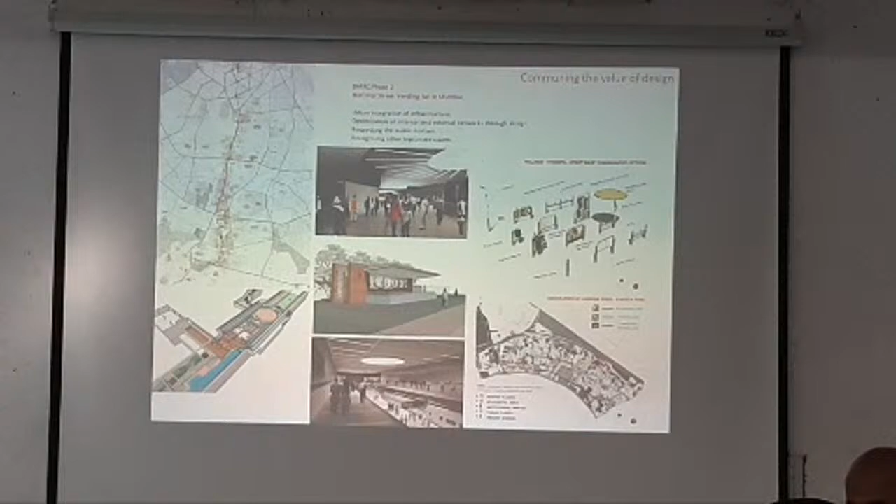That is one of the things I think when you do public work: you have to accept that nobody is going to accept everything you propose. There is a lot of friction, a lot of opposing views. Some of the stuff you propose does go through and a lot of it does not. But that's not necessarily a bad thing - other people have other views and those also get counted.

One of the biggest things we were able to do in Delhi were two contributions. One was, it was the second phase, so there was already a series of stations built, and one of our suggestions was to create a double height volume, which was a big deviation from the first phase projects. Though a lot of our smaller design solutions were not accepted, this was, and I think it makes a big difference to the 7, 8 stations where it was implemented. So that is a kind of achievement.

The other thing we managed to do, that's the little image you see here, is that we got everybody on board with all the services designs to make sure we didn't have what we'd noticed had gone wrong in the first phase - lots of services very badly integrated in the project. Given the importance of services in a project like that, that was one of the things we used to try and give some orderly design.

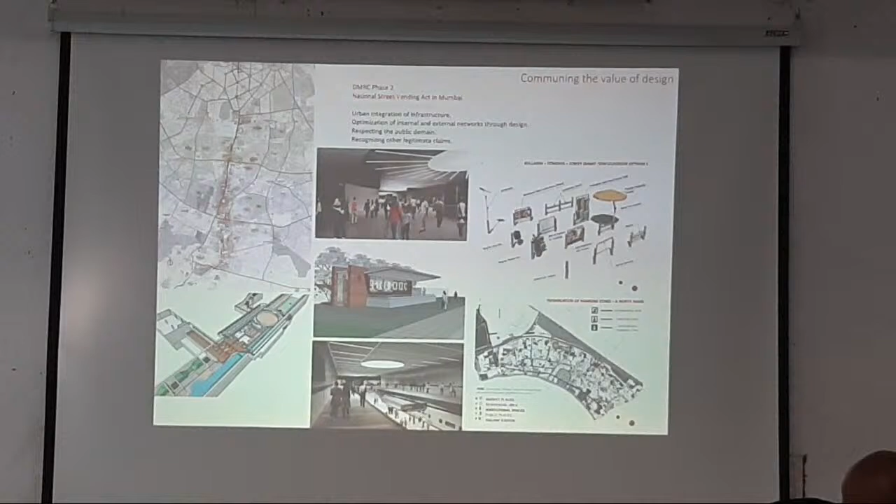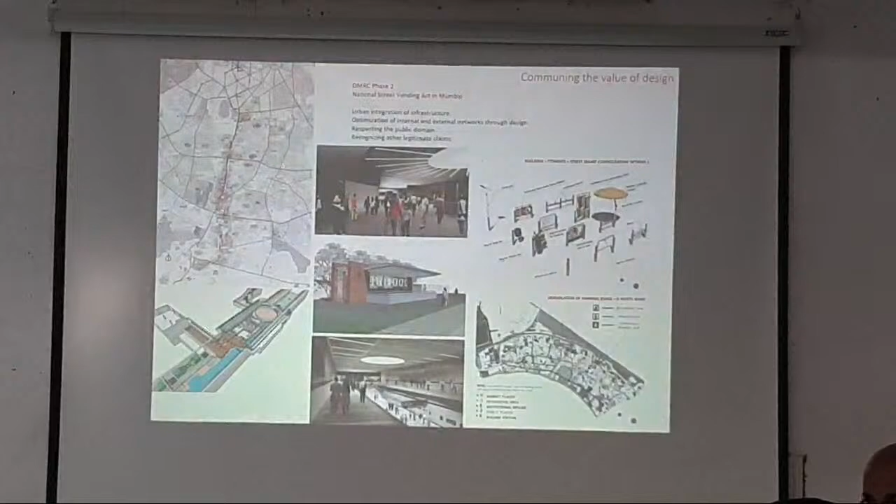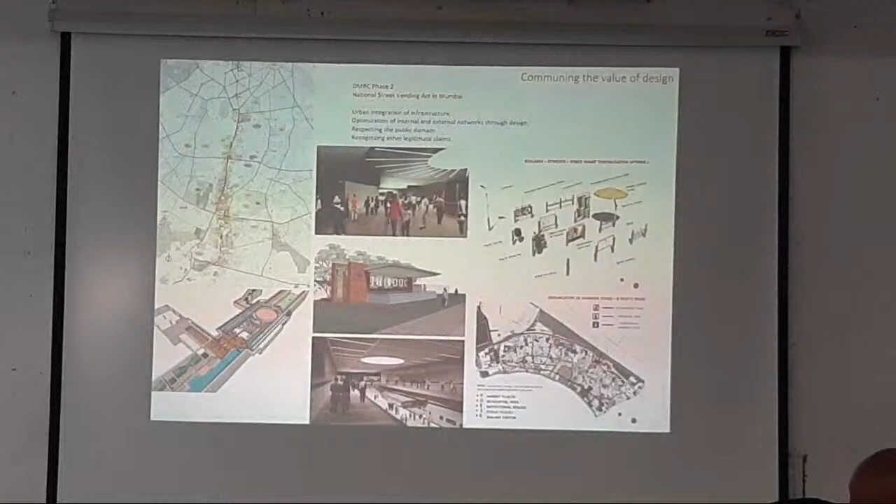The other major submission we worked on was in 2013, where there was this new National Street Vending Act, and I was advising the Mumbai Municipal Corporation on how it could be implemented. The act was very detailed, but the spatial aspects were quite random - they'd just randomly decided a 1 meter by 1 meter space would be given, and on what basis was not very clear. It also said the municipal corporation had to appoint town vending committees to decide, but how they would decide was again not very clear. So our idea was to create a kind of common base based on which these vending committees could decide on hawking policies in each part of the city.

Then there are some public projects, landscape projects, architectural projects. One is the extension of the botanical gardens at the Byculla Zoo.

This is done, finished just after the pandemic. This was a project which we did through the college, through the Rachna Sansad design cell, and we did it entirely through the standard municipal tenders and all that.

So a lot of learning, but at the same time we managed. I think that's one of the things - there are very rigid processes, but if there are things that you think are important, there is a way to work through them. It is still possible, it is tedious. Pranav will also know, Samir will also know, but it is still possible to try and get things done, as long as you have some open-minded officers in front of you and you can do things.

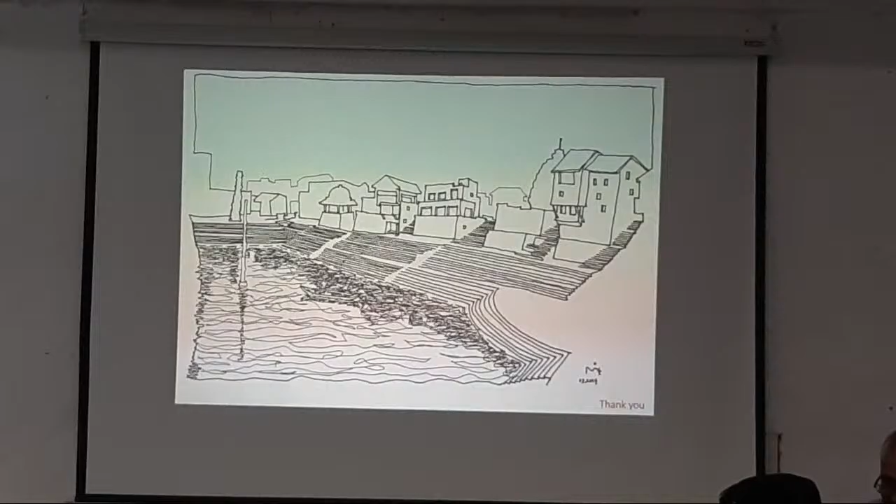Thanks, Rohit, that was great. I really like seeing a project where there's nothing visual about it, because as architects we really have to resist the temptation to be these fantastic guys who parachute in and do something, like a design hero role. It's very tempting to play that role, but I think what he did was perfect. He saw something that was really required there and focused on that. So it's a great pointer to take from that.

I'll be quick because I think there's a lot of us to get through, so I'll tell you a bit about my route. I took a slightly different route to a typical architect. When I graduated, I went and worked in a structural engineer's office. I actually worked for Shirish Patel. Jasmine knows him well. I'm still not sure exactly why I did it.

I think I felt I didn't understand structures properly, and that I needed to in order to become a good architect. So I went there, and luckily he's one of the most brilliant engineers to exist in the world. He can solve any problem in structures to an approximation in, I would say, 30 seconds. So it was great for me to actually learn that.

Then I set up his architectural department, and we did lots of interesting projects. I did aircraft hangars, and we did factories for BMW and Skoda and lots of other interesting things, and earthquake resistant housing, stuff like that. Then at some point I quit and set up my own practice.

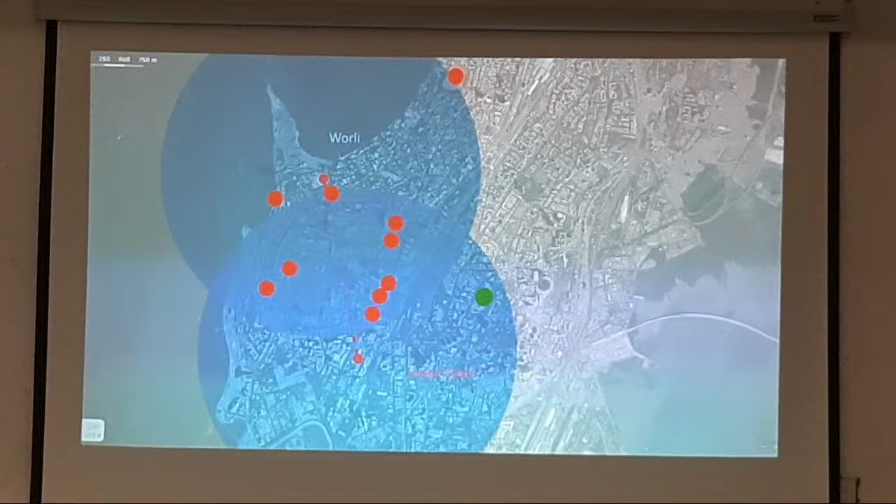Like Samir said, I'm walking and I'm observing things and I'm saying, hey, what's wrong with you, why are you doing this? So let's fix it, let's fix it, every time. The way I see it, it's actually a selfish pursuit. I see myself as a pretty selfish person, that I want the road I'm walking on to be nice, but I also want it to be nice for everybody else. So it's the selfish pursuit of a higher quality of life for all. That's the way I see it, and that's how we've been functioning with our public projects.

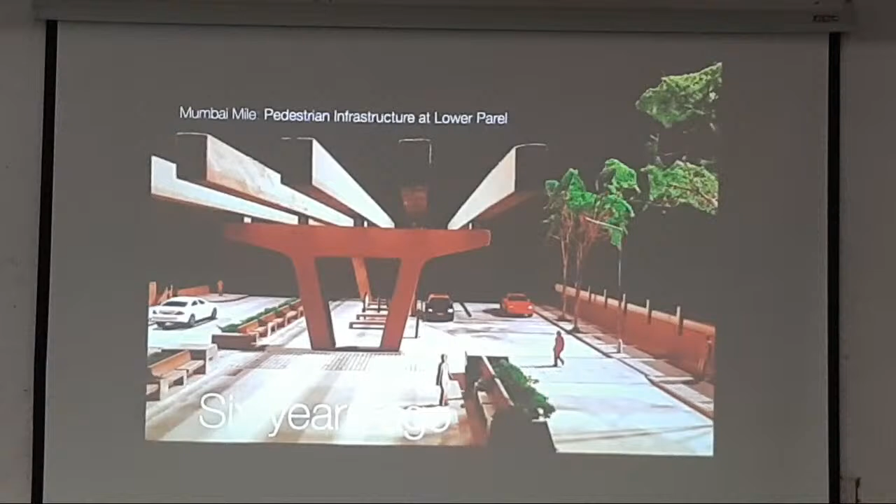So this is the second project I'm going to show you. This is Tulsi Pipe Road, and this was 6 years ago. This is spaces under the bridge at Lower Parel. A small diagram of what it looked like: office buildings everywhere, and illegal parking with one U-turn in the middle over there. A lot of cars just sitting there, and spaces under the bridge being used as a toilet, and really tight spaces over there where the two arrows are, because the U-turns were really tight.

And it was actually common sense that you don't have this sort of U-turn over there. These two green arrows are the only places where you could cross the road. So this was a whole big mess, this junction at the end of it. So he said, hey, move that U-turn so you have some more space for the signal ahead, and add some more crossings. Why only those two crossings on one side?

So they agreed, and we got these two crossings here. We reduced that size in the front so that you can have more cars waiting at the signal, and then we tapered that off. We made a turn over there. And in the purple, we created a public toilet, so that people don't have to use the columns of the bridge to piss on.

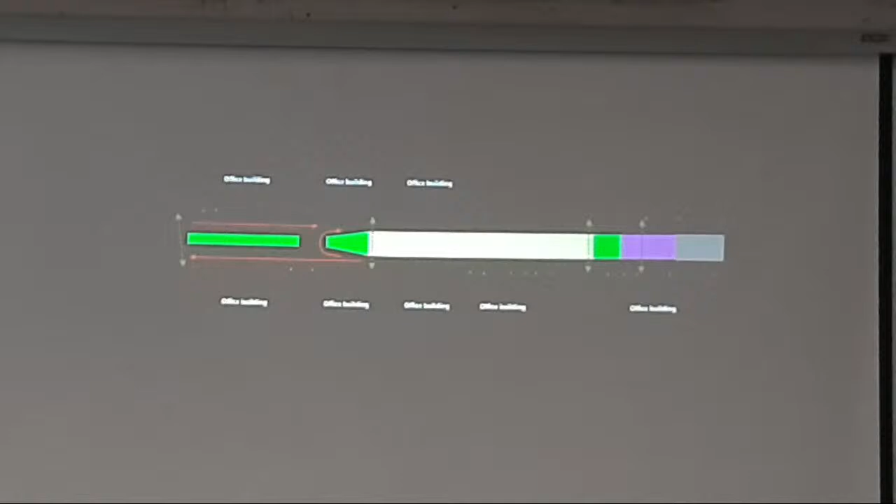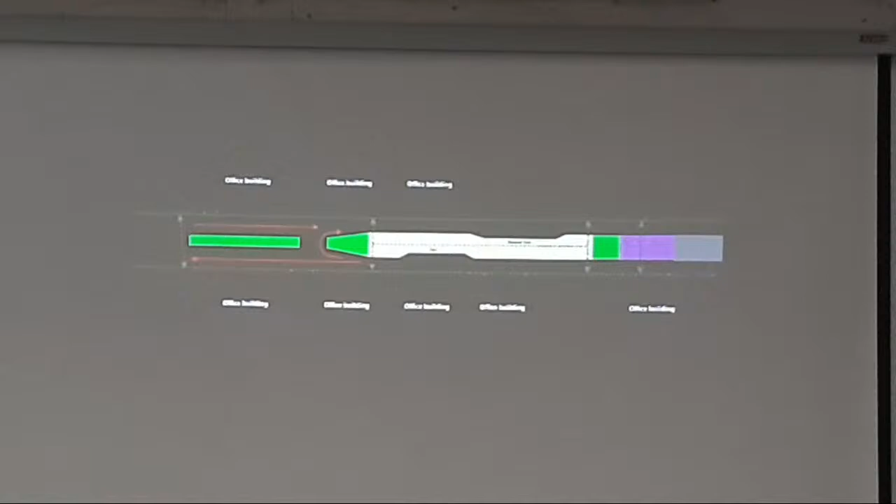After that, ahead there was a shared taxi stand near Kamla Mills, so we brought that in here and made taxi bays for them. Overall, we added a lot of footpath space, because you can now cross over at any place and walk across this, or sit inside that and come.

No one comes to you and says, okay, there's a public project, do the public project. So what are the kind of processes and methods you follow to begin to intervene? This is a drawing from one of our projects in Hyderabad, showing how the city surrounds the building, and you're interested in how the building can become part of the city, part of the context. So I think we want to talk about the method we followed.

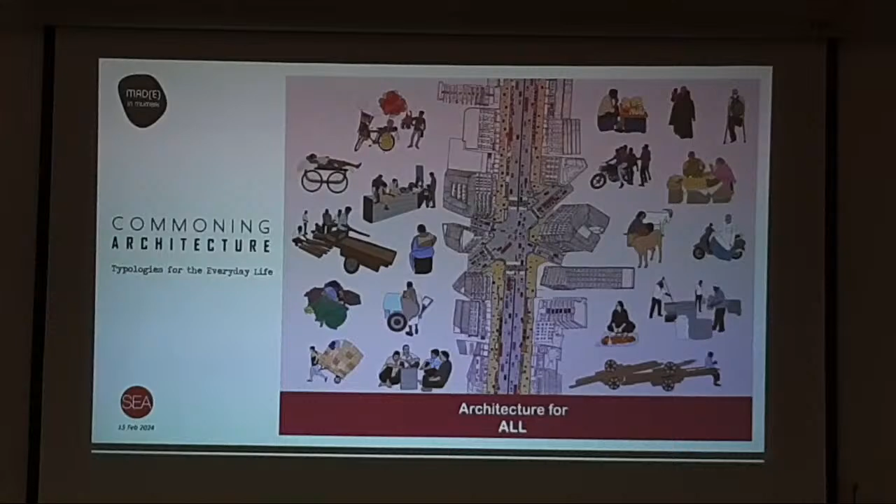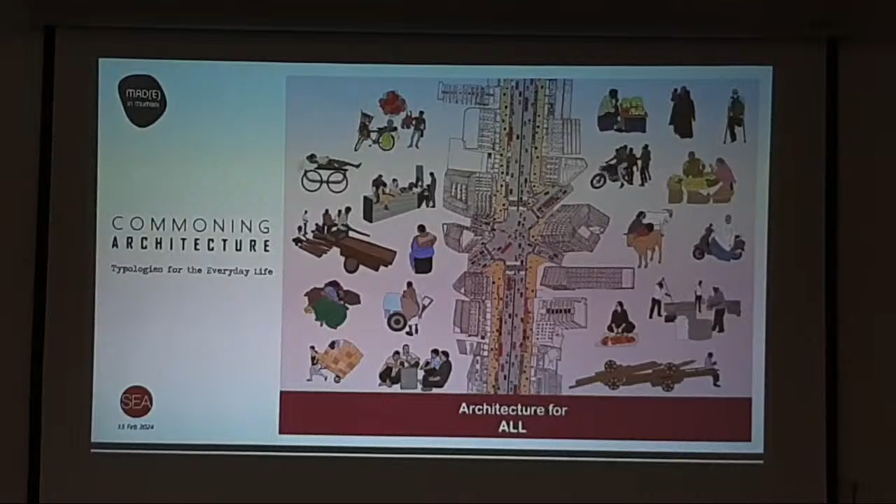This is a drawing from one of the competitions we did on street design, and the context is made up of a variety of people who are staying, working, storing things, and passing by. So the domain is made up of multiple sets of stakeholders who currently occupy it.

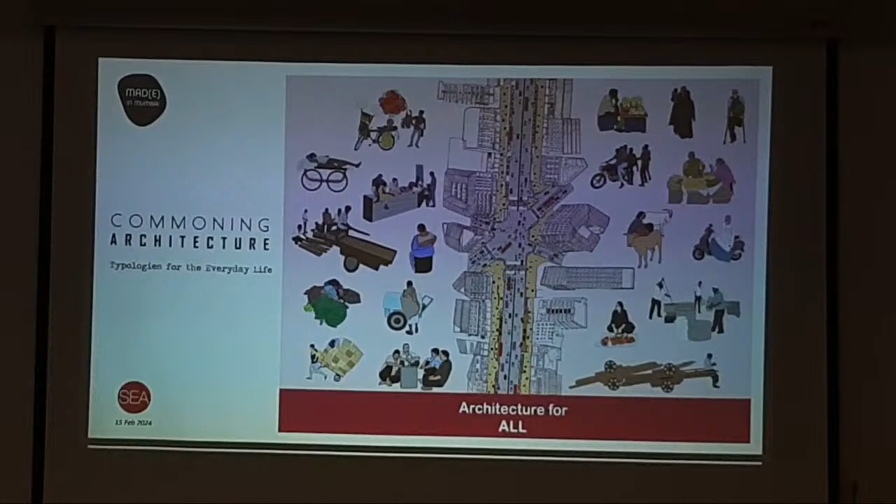Other than the people who live, work, and play, there's also the domain of bureaucracy, which moves around. Even if you're moving a light pole, you go to BEST. If you're looking at a tree, you go to the garden and trees department. There's a traffic department interested in regulating how traffic moves. So there are various stakeholders working alongside, and on the ground there are commuters, hawkers, vendors, and people visiting the market.

There are lots of goats on the street, tied there because they belong to the shop owners and are fed leaves every day. On a Sunday, the entire pavement becomes a bathing ground for all the goats. So there are a lot of multiple stakeholders on the ground.

If you look at this, the in-between city, which we see between the comforts of our homes and large infrastructural projects—this is an in-between, kind of liminal city.

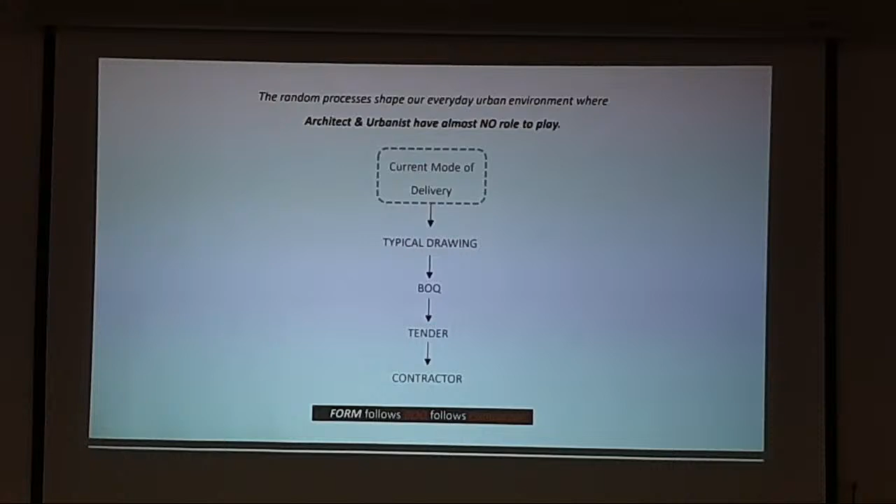If you wonder why it's like this, look at the method through which the city gets made. For any projects—let's say public toilets, or smaller projects in villages, or Anganwadis—the method of making is: first you have a typical drawing, then the BOQ gets made, then the tender is invited, and then it goes to a contractor. The role of an architect, urban designer, or urban planner—there's no role for any of us actually. So how do you make space for us? Generally the form we experience in our everyday city comes out of this process. So the form of the city, in some sense, follows the BOQ and the contractor.

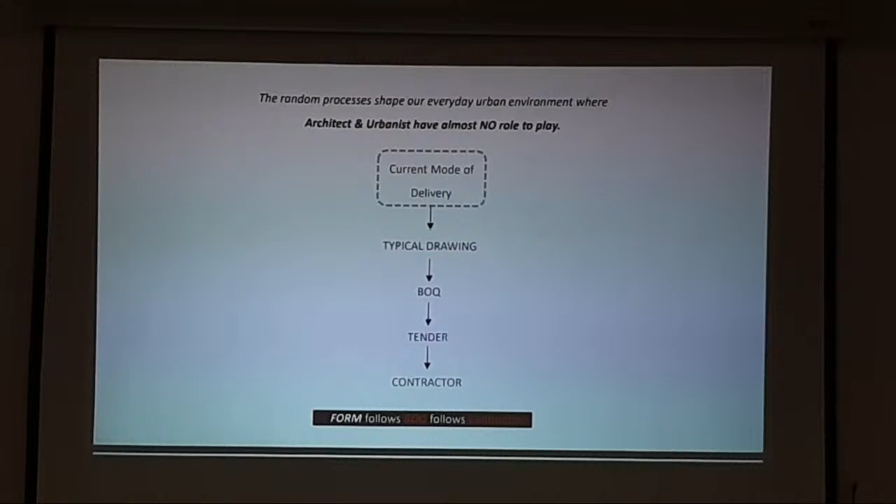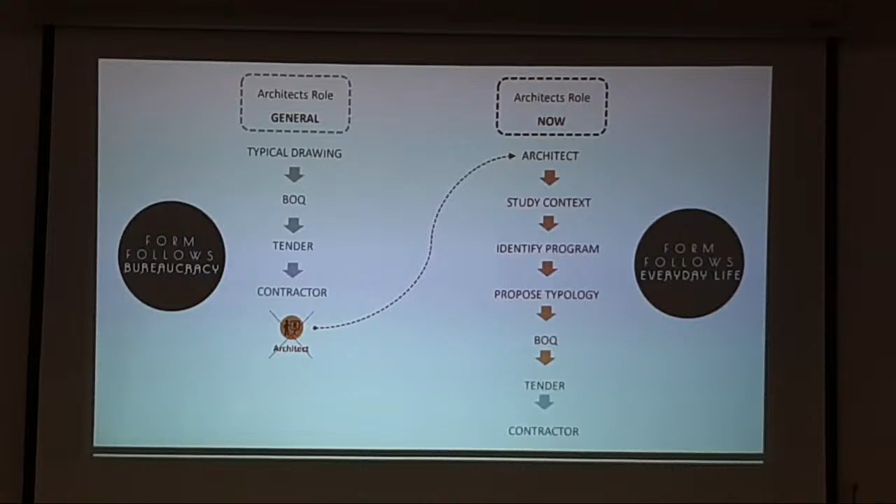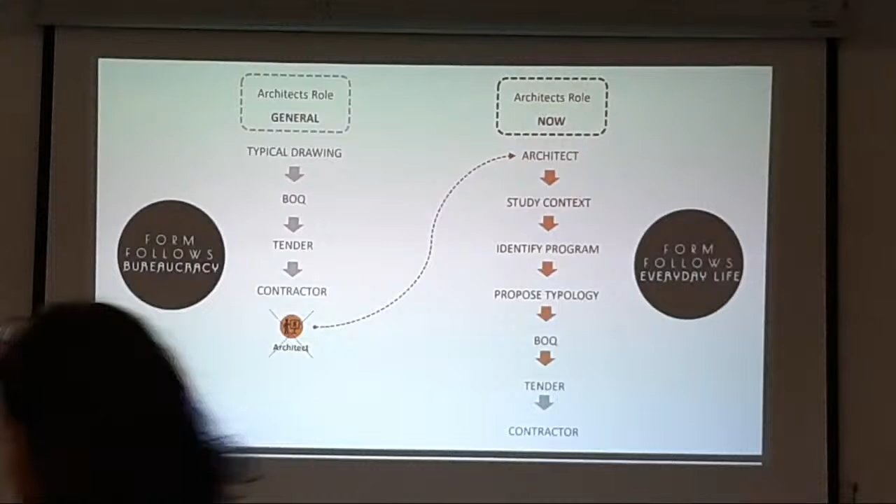The ideal method through which we wanted to intervene is: when there is a project, you bring an architect, urban designer, or urban planner. They study the context, they study the site, they look at the stakeholders who are part of the landscape. They identify things, it's the way we do projects in college—you identify stakeholders, you identify what program can go into there, you figure out an appropriate typology. Then you prepare a BOQ, then goes the tender, and then comes the contractor. That's the method through which we wanted to work.

And then we wanted to work with what role architecture and design can play in shaping this everyday environment.

If you study what the state is currently building, there are multiple chota programs being built where architects and urban designers aren't involved, unlike in larger projects. A chota project is a public toilet, a seating, a bench, or a crossing. That's why, when you're walking, a crossing will hit a pole, or be barricaded, or there'll be a statue there—because no one is actually looking at the ground and saying, okay, there's a crossing here, people need to cross, so there has to be clearing. So you need someone to look at these very chota conditions very carefully.

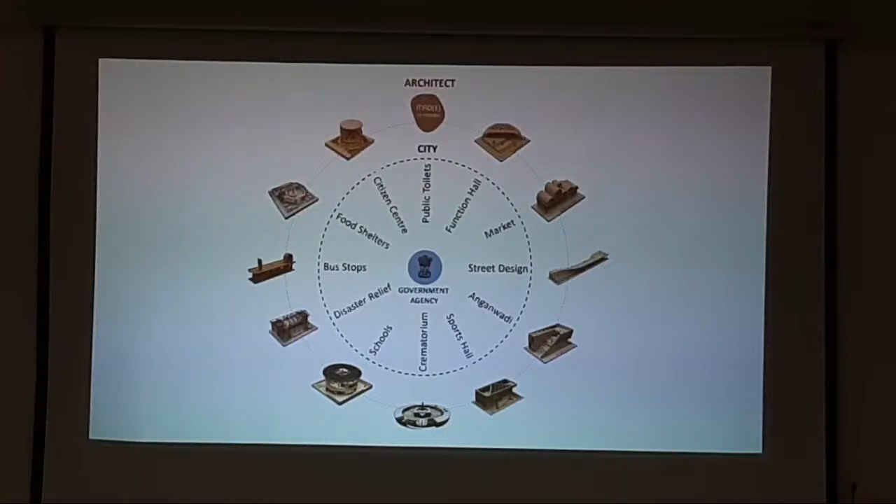So now what shall we do? We want to enter this landscape—what do we do? There are a few methods we followed.

One was the making of books and publications, looking at certain smaller programs of the city and making a manifesto of how you go about designing them. Along with the publication, there was this idea of an exhibition—how do you reach out? Your client is the government, the politician, the bureaucracy, the everyday public. How do you really reach out to them and explain what your role is?

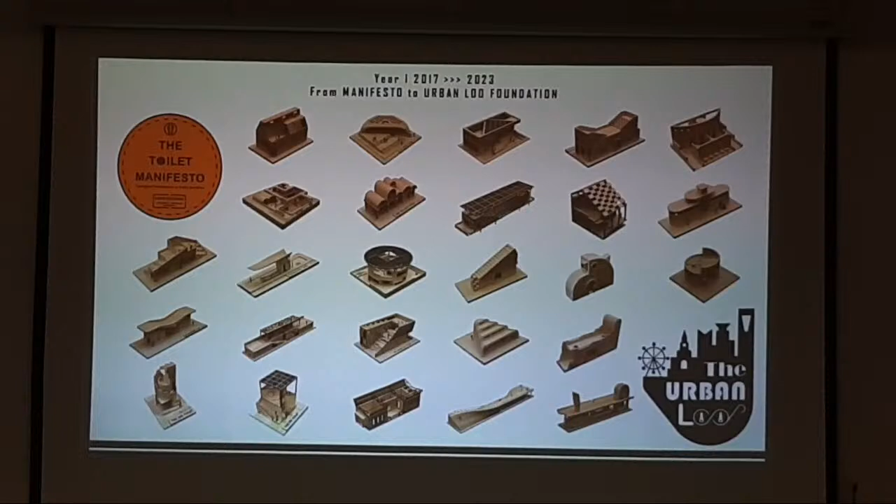So we started with a traveling exhibition—this was in 2017. We designed a manifesto called the Toilet Manifesto. It was funny because toilet was something so small and mundane, a dirty program, and yet there was a large manifesto dedicated to it. It started as 10 typologies for the city, and has grown now to more than 75 typologies.

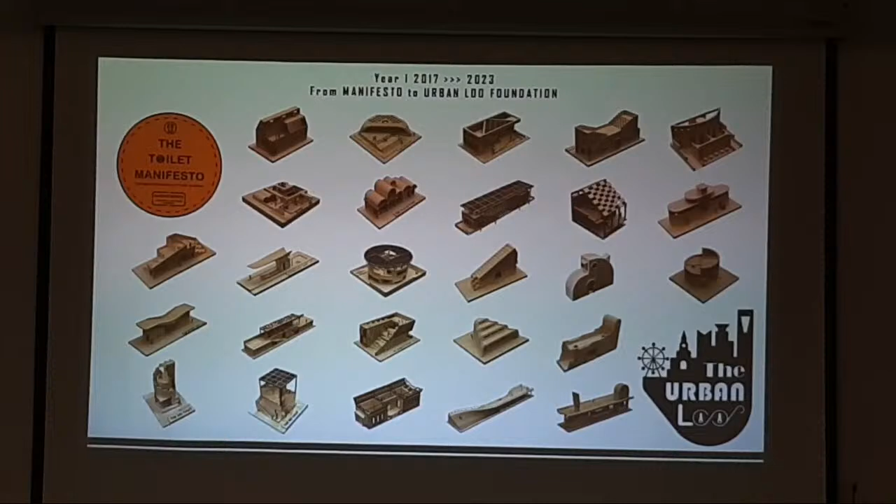We started with the site condition—what if it's a pavement site? What if it's connected to a garden? Or what if it's an island in the city? What if it is located within an informal community? So what should the type be like?

As we traveled to different cities and states, we were commissioned for different sites. From 10 typologies, it grew and kept changing. A different site would bring another typology, and one typology might tweak and become another kind of type in a way.

But over a period of time, we realized that implementation was a major issue, because it will go into a tender process. The tender process may mean you get certain kinds of contractors, because the budget of a toilet project is very low.

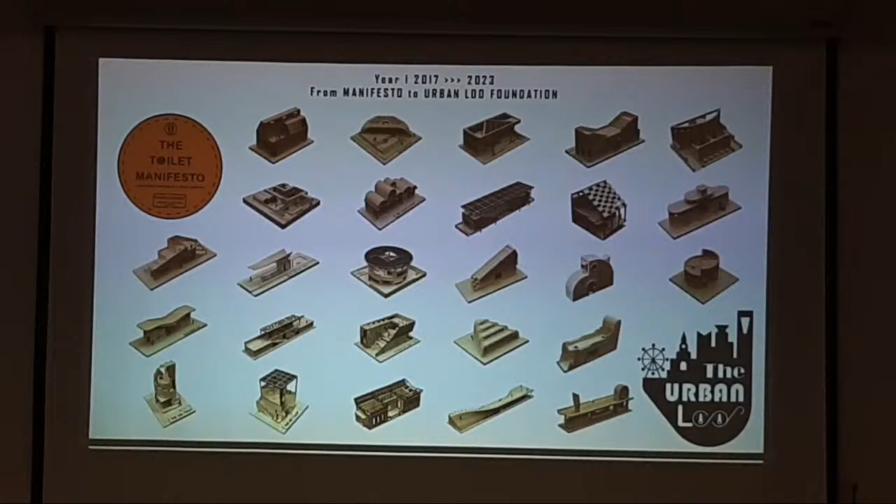So the kind of contractors you get are the last category of contractors. And then you're going to completely compromise on the fundamental - I'm not saying so much on aesthetic, but the fundamental architecture. There's a toilet, so there has to be ventilation and light coming through. But with a contractor who doesn't understand this, it becomes really difficult, because aesthetic is okay.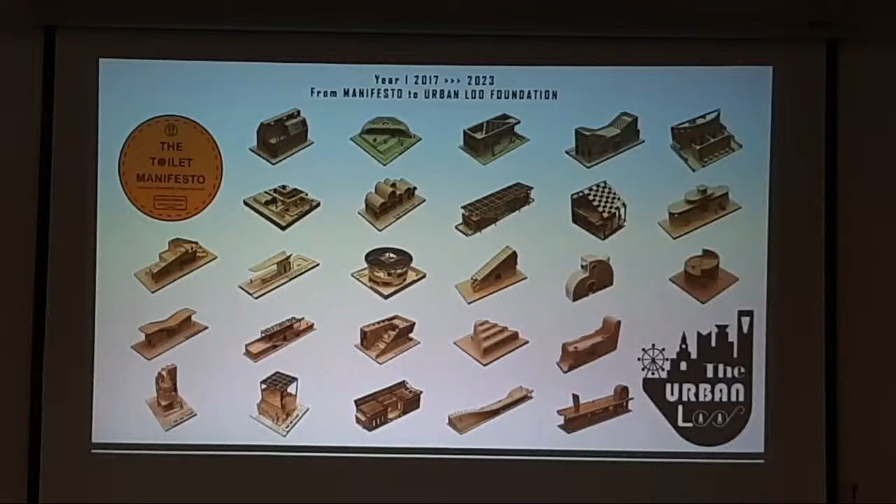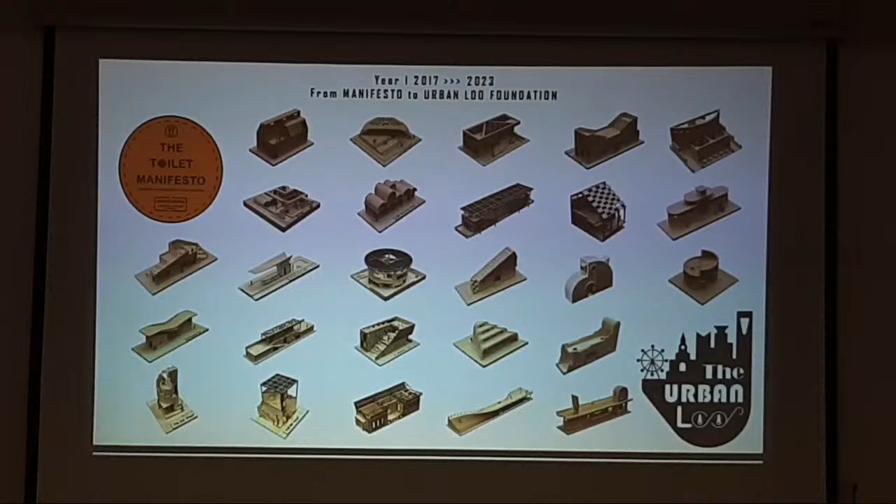So then, a few years ago, we formed this foundation called Urban Loo, which looks at the idea of sanitation at a larger scale, studies different kinds of public spaces and city landscapes, and identifies the critical spots where public sanitation facilities are needed, what scale is needed, what program is needed, and how to do hybrid programming depending on the particular condition. Then we propose a typology, we build it, and we also maintain it - there are other stakeholders within us who build and maintain it over time, and some stakeholders are also ready to fund it now. So from just a design agency, it has grown to construction, build, and even fund.

So exhibition has been an important process. I think the first one took place on the lower floor of this building - I was still young, we didn't have many built projects, but a lot of drawings through which we were communicating our ideas, our vision, and our interests. I think that started in 2016.

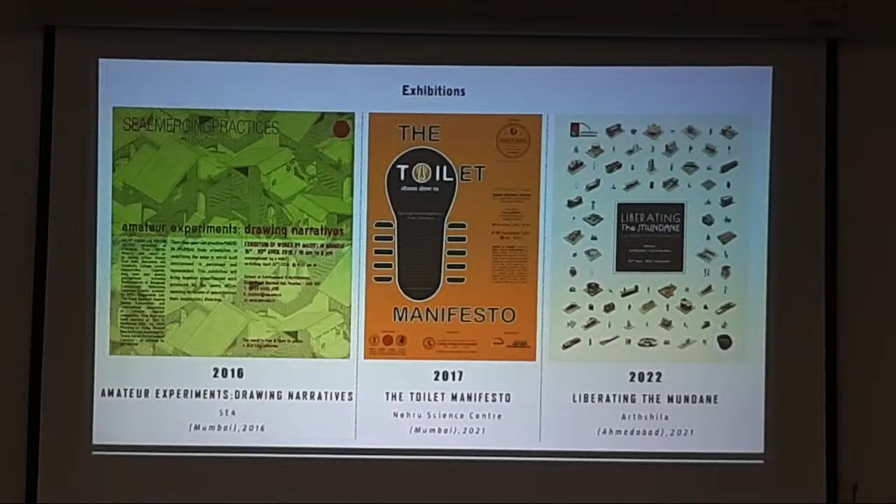2017 was the Toilet Manifesto that we did at Nehru Science Center, which was fundamentally looking at what toilets can do for the city. The last one is Liberating the Mundane - from the Toilet Manifesto, as we traveled to different states and cities, the municipal corporations began pushing us in different directions. There was an Anganwadi project, a public garden, or a bus stop - so it branched out from the toilet to different kinds of directions. These are all the traveling exhibitions we've done in different parts of the country.

This was at the Jawahar Kala Kendra - that's where it actually opened up.

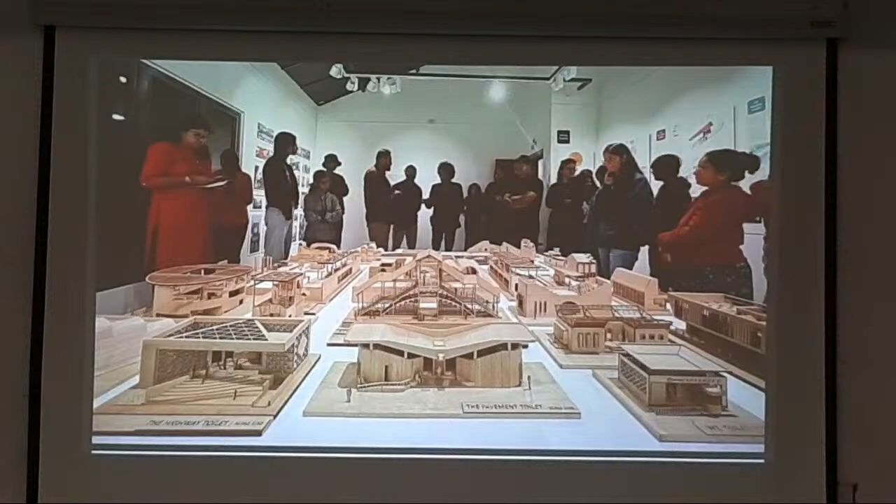So now from 10 models it has grown to multiple models.

I think politicians, bureaucrats, municipal corporators - all different kinds of bodies - it was important to reach out to them, because sometimes you realize they are also looking for something. It's not that they don't understand design - they understand, but they're not able to reach the right kind of agency. So I think models and exhibitions have been the right method to communicate.

What was nice at the end of the process is we realized we'd be sitting with engineers from the municipal corporation, and they would say, this is a circular type, and we have land in the middle of three intersections of a road, and there's a traffic chowki that needs to be planned. Why don't we use the circular type, because it will work nicely as a traffic chowki on the upper level and a toilet on the lower level. So they would connect with us and understand what a typology is, in a way.

I think we've traveled to 25 cities, almost 8 states, in the last 6 years. We also traveled to the Tallinn Architecture Biennale, and we went to the London Design Biennale.

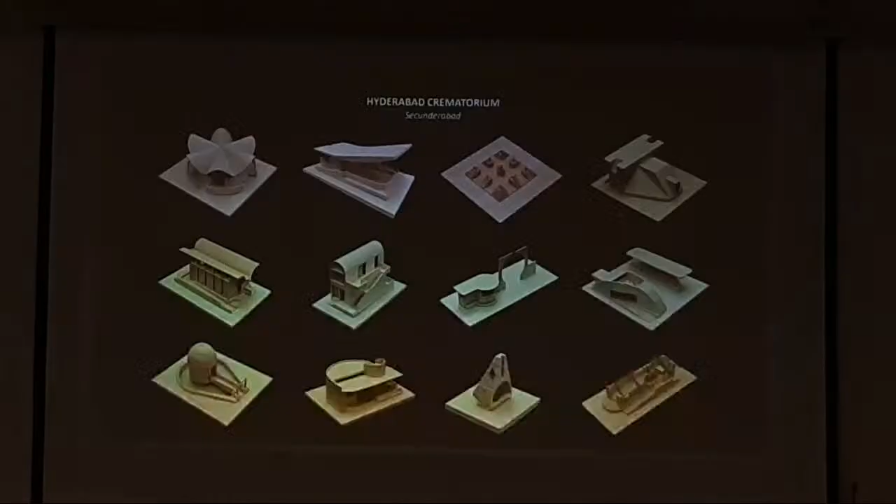From what I was talking about, it branched out to different kinds of functions. This is the Hyderabad Crematorium, where there are burial grounds - Hindu, Muslim, Christian burial grounds, all together sometimes - and now they're transforming into crematoriums because there's no space left to bury. So there are sites with a lot of graves and residual land for cremation programs - you just need a tinier function since there's no large land available. So there are these tinier follies.

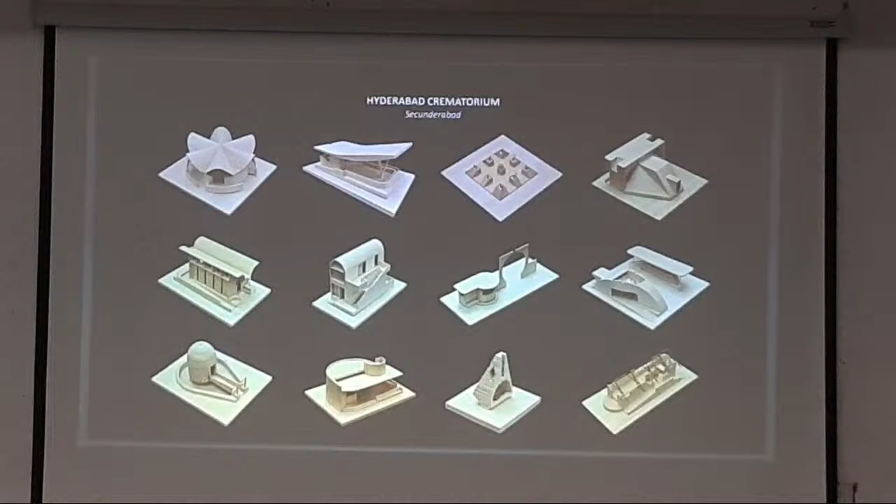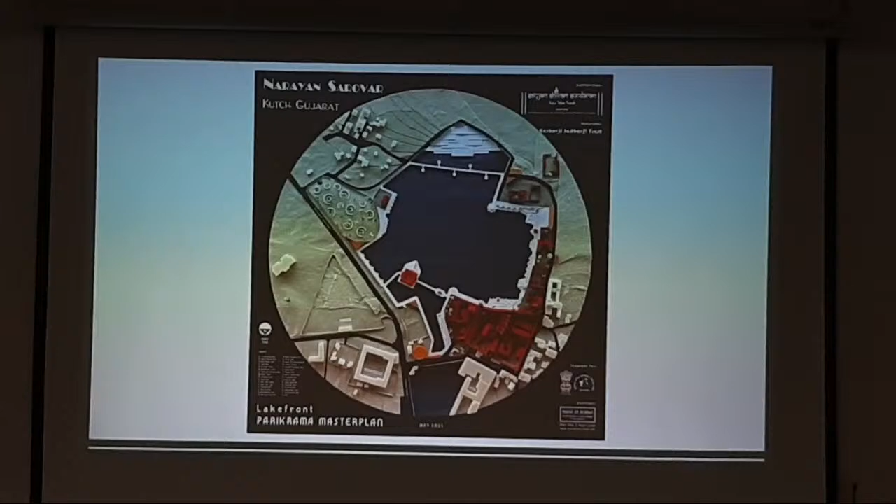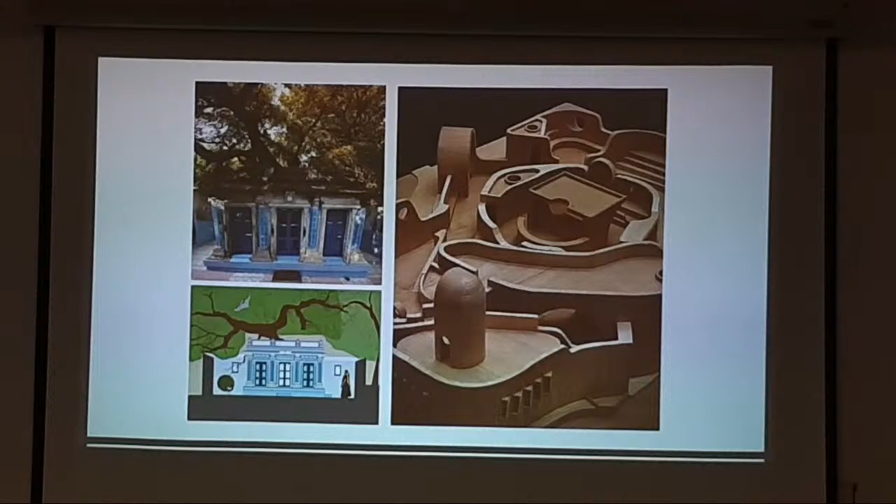This is part of the street. This was a street design project, looking at Grant Road and looking at all the kind of conditions. This is a very important project where it's looking at the road conditions on the entire road and responding to each condition.

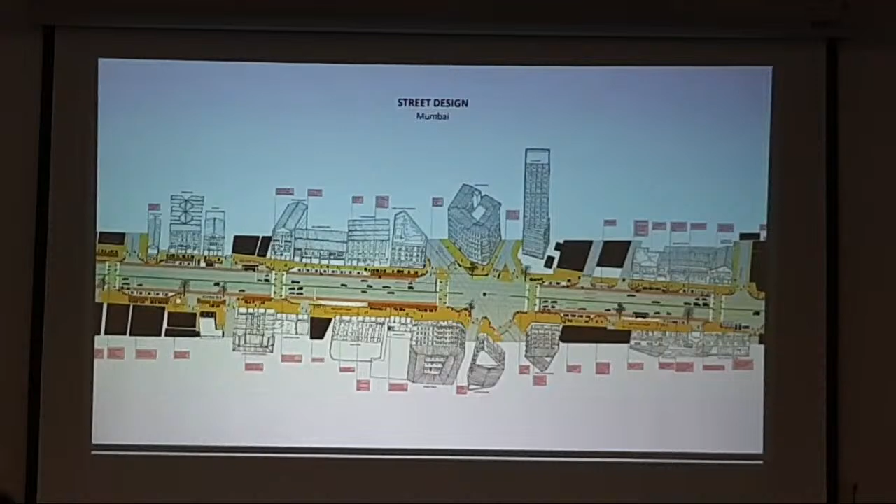This is the Purana Pul project in Hyderabad. It's an old historical bridge. Now it is not fit for vehicular movement, so it's converted into a market and a public space. It was a replanning of the entire bridge.

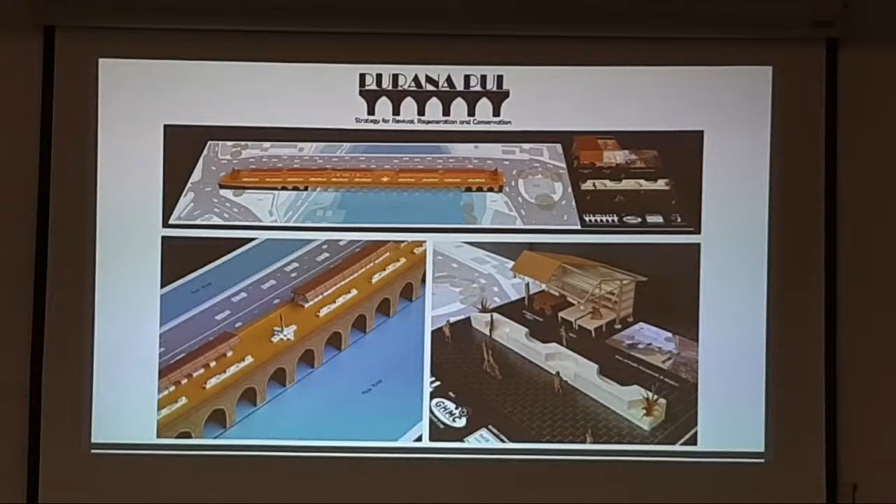We were commissioned in Hyderabad for around 53 sites for different facilities. These are some students from your college, and this is when we were commissioned for the 53 sites. This is the kind of production of drawings - each set has almost more than 250 drawings, and there are 53 sets of it. So this is the kind of dynamics of everyday life at Made.

Riddhi said that the projects come like waves.

First, there was a Rajasthan project when there were 70 sites committed to us, and suddenly we are there in Rajasthan for 2 months, just traveling from one town to another, identifying sites. They actually wanted us to do entire Rajasthan, all villages, all cities, and they said they wanted it in 2 months because elections are there. We said even if we go from one village to the other, it will take 2 to 3 months. So we said okay, we will do where we can fly, so we can easily reach there, and we'll shortlist to 70 sites in main cities.

So then we also thought of what if we buy a caravan and put our team on the caravan and keep traveling, keep deciding. And I'm like, no, it doesn't happen like that, we'll not reach entire Rajasthan. And I was like, oh, we'll do it, we'll project in villages. And Kalpit's like, no, we will not reach all the villages. So it's like a long phase.

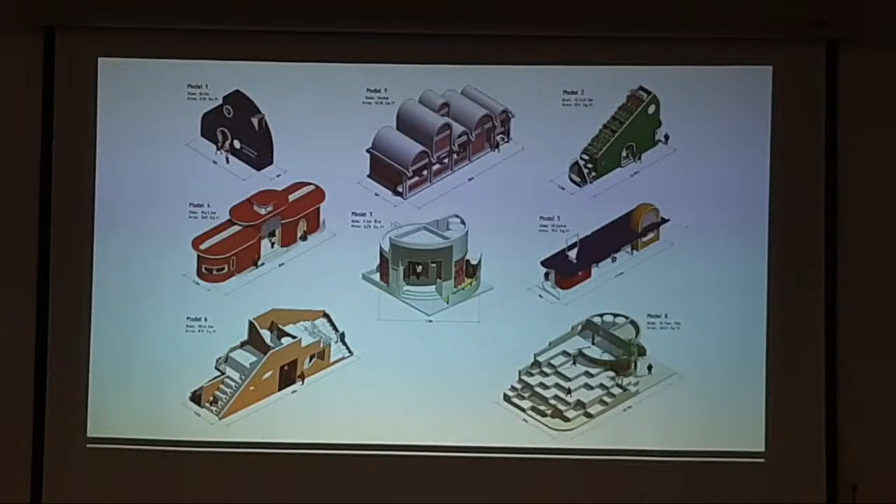These are the smaller kind of typologies we kind of developed over time. And these are some of the built projects.

This is in Rambagh Circle - it's a bus stop, public toilet, and a small baby feeding room for children, for women and children. I think now what is nice is since it has this open amphitheater kind of space, it's open to everyone. So now anything they want to hold, like some morcha or protest, or they want to meet for morning walks - there is Rambagh Palace across, so all the staff who come out here to eat dabba or something, it's a nice space. You overlook the entire roads and traffic moving by, you're looking at everything, it's a nice quiet space. People come here to fill their water bottles, they get out of the bus, sit here for some time, move on. So it's a nice space to actually be in the street, because there are not many spaces where you can actually be out in the city.

This is a part of Govardhan Park where there's a tiny eatery and a public toilet. Earlier, no one wanted to build public toilets next to their sites, but now it's become a pre-wedding shoot destination. People come and take pre-wedding shoot photos. Also, a lot of kids come - earlier they used to do TikTok, and now they do reels and everything in front of it.

This is that circular toilet which I was talking about. It's in Jaipur, near the Commissionerate. On the lower level is a toilet, above is a traffic chowki, and it's at the intersection of 3 roads, opposite the police commissionerate. It's a very nice building across - these are the kind of spaces.

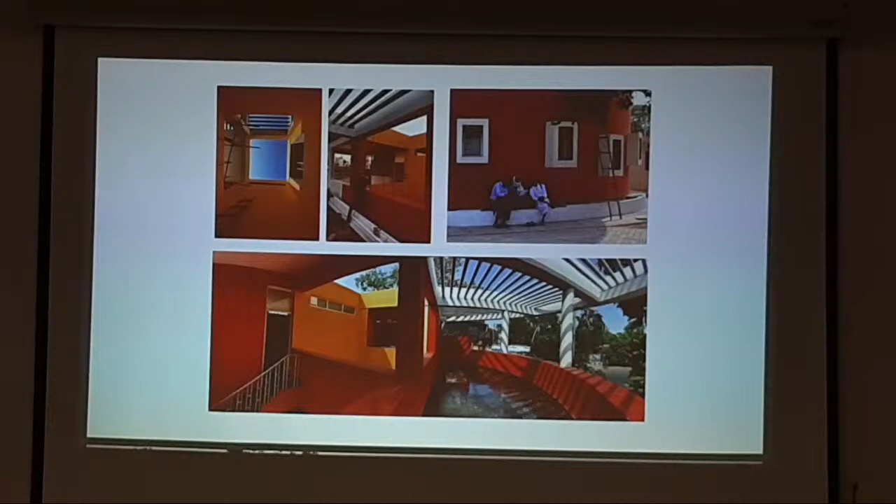This is in the Ram Nivas garden. It becomes a space for performance in the evening.

This is the drawing you saw in the beginning. It's the Hyderabad Urban Do project, outside the Secunderabad railway station, in the middle of mad kind of movements. People exiting from the station, bus stops are there. Next to that, there are these AC bus stops built, closed with doors, so no one goes and waits inside because everyone's outside. Although it's AC, everyone's outside, and they're all closed and dirty, and people are spitting on it. So weird. So this is the project.

The idea is very simple: Secunderabad had a lot of clock towers, so you go to the memory of the clock tower. Of course you need good light and ventilation within the spaces. The local stone, slate stone, is used to give you good light and ventilation. That's actually fundamentally what a toilet needs - good sunlight, good ventilation and air. So even if someone is not cleaning, this will make sure it doesn't stink.

The AC toilet doesn't work. So that's what we are trying to do. And as a small gesture, there's a kind of tree, so you make a seating, people can sit there. So it's simple, it integrates well into the city.

This is the inside. It's a nice airy space. Skylights are there. Also the idea is that you can't use a lot of light because you want to run low on the kind of bills and everything. So good skylights and everything - in the daytime, it runs without using a lot of light.

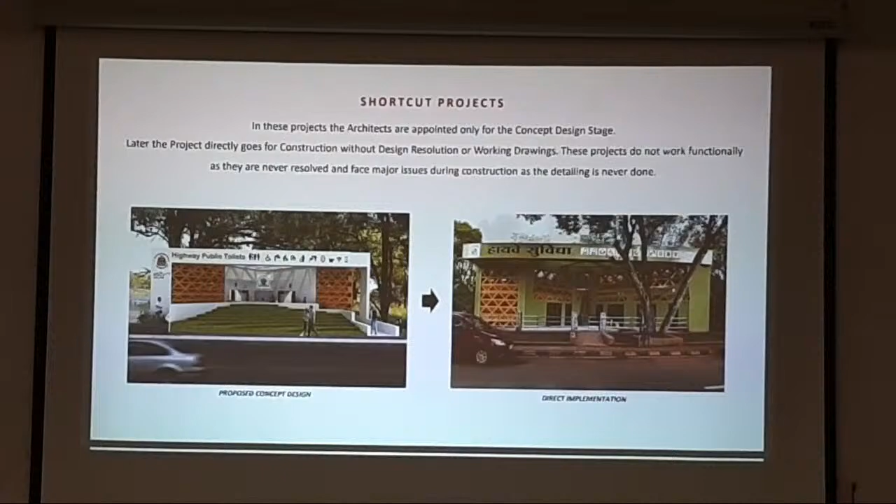This I think I'll skip because it's long things. I'll just skip it. It's actually the process of what we actually learned from this. I'll skip this part too.

This is the kind of bureaucracy you actually deal with. Your phone is filled with like Srinivas Shetty, some 20 Srinivas Shettys calling, and you don't know which Srinivas Shetty is calling from which zone. So you say, Khairatabad Srinivas Shetty, number this, linked with this site. Your phone is like a mess - if someone calls you're like, whom am I talking to?

And it's funny when you suddenly get - I remember Rupali and Prasad called us that Vasundhara Raje was there and she wants you all to come to Rajasthan. And that day, I don't know how, my phone was filled with 100 phone calls within half an hour, and you don't know whom you're talking to. And language sometimes becomes a barrier because the Hyderabad language is such that you don't understand much. So I think somewhere drawings and everything works much better.

Of course, the teaching has been an important part. I think since we came out of college we've taught, so there's somehow no distinction between teaching and practice. It's one for us.

This is a part of some of the academic projects and work we've done. So this is the inquiry: the process is academia, competition, manifestos, exhibition, and publication. These are the kind of methods.

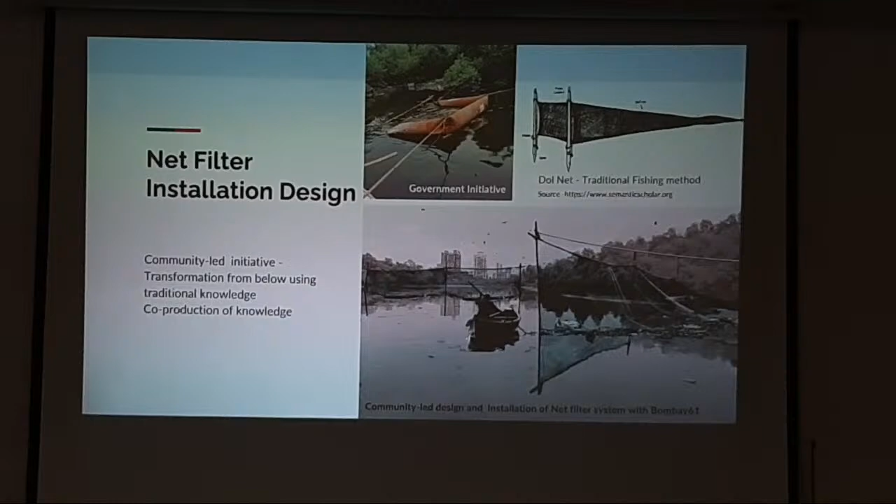So you'll see that none of our projects really come from approaching the authorities or going through bureaucracy, but we work directly with the community to devise these projects.

And how we do it is that our practice is embedded within the community. Our studio or office is located right in the middle of the Kolivada, so that becomes a space where the community comes together, where conflicts happen and negotiations happen, because there are a lot of conflicts existing within the community as well.

So our role becomes more like a mediator, where the community comes together, and most negotiations happen there to arrive at certain decisions concerning the commons. The process starts with ideation, then implementation, and then we move to dissemination, in the form of exhibitions and dialogues that happen within the community and beyond. That is the kind of practice we have been having.

This is an array of projects that we've been working on within the Kolivada. Our practice is also based on different scales, the urban scale and the place-making that happens within the neighborhood, and also certain architectural practices, which we again do with the community, which forms the economics of our practice.

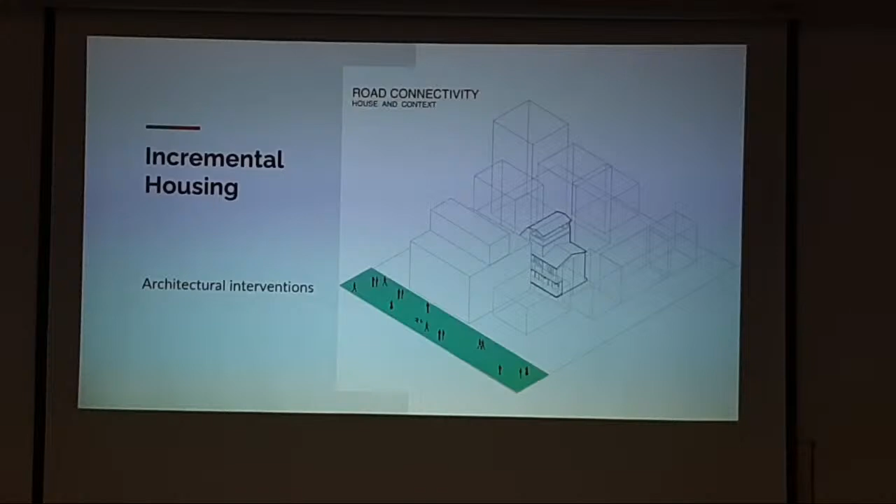It's based on the ideology that, you know, how there is a doctor or a clinic for every neighborhood or community, we feel there has to be an architectural practice or urban design practice specific to a community. And so the work is endless, and it goes on at multiple scales and with multiple concerns.

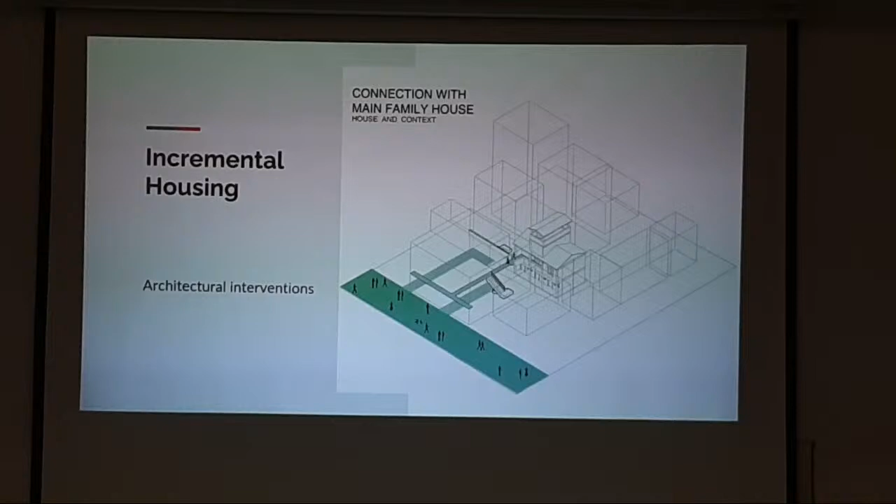So it's never like we did one project in Versova and then we're done, that's not how we work. It's a practice embedded within the community, and the work is endless, it's limitless, it goes on. Yeah, thank you.

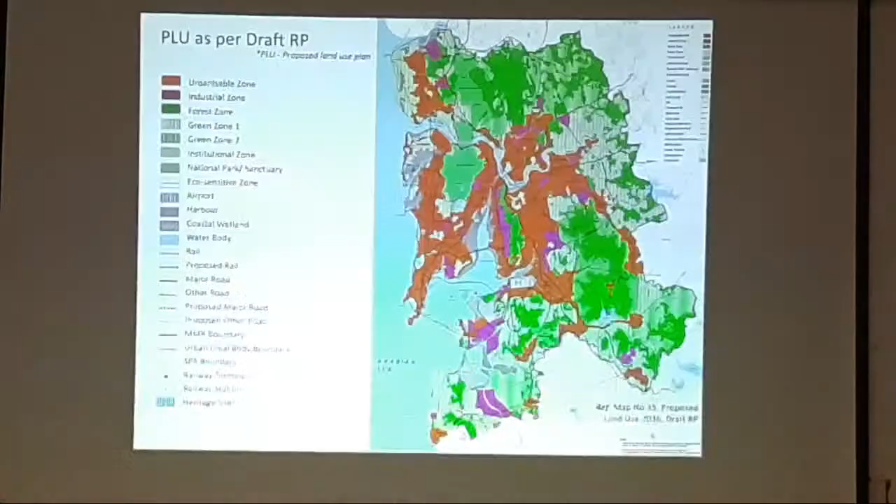This was the regional plan, whose draft was published in 2016, and the final plan was published sometime in 2019, but it was quite convoluted because for a long time it was nowhere to be seen. One of our main observations when you look at this plan is that it's really green.

You see all the urbanizable areas, and the purples represent the industrial areas. It's really interesting when you look at it.

We then studied all the land uses and what's allowed under each zone. So what you see as largely green, if you study it in detail, out of the 31 permitted uses, there are 28 uses allowed in green zone 1, which is even more than the urbanizable zone, and 14 in green zone 2.

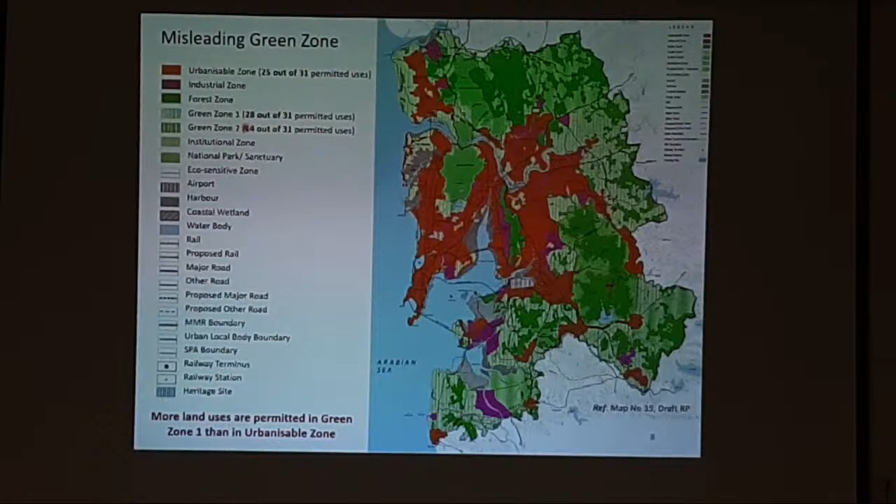So actually, when you analyze it further, this is what the region will look like. Even though the regional plan suggests it's going to be highly sustainable and green and they're going to contain the sprawl, it's not really the case.

Through working on the regional plan, we've also been working with some of the indigenous communities. We've largely been working with the Koliwadas and Gaothans across Maharashtra. Some of their main concerns at the moment, other than livelihood or community empowerment, is the first thing that's happening.

They're losing their identity in the city, because of the way the settlement has fared over the decades in terms of infrastructure, sanitation, both sanitation and trunk infrastructure, deteriorated living conditions, and poor building stock. They are being typecast as slums, which means they come under the threat of eviction and SRA.

And actually, these are communities that are really still very deeply involved in their livelihoods, in their settlements, and also in terms of being an integral part of Mumbai and Maharashtra.

We've had several meetings with them over the last seven or eight years, and largely what they need to get into at a community level is the environmental rights, because at the moment even the CRZ regulations have not actually identified their settlements and the different fishing allied activities that they need to carry out.

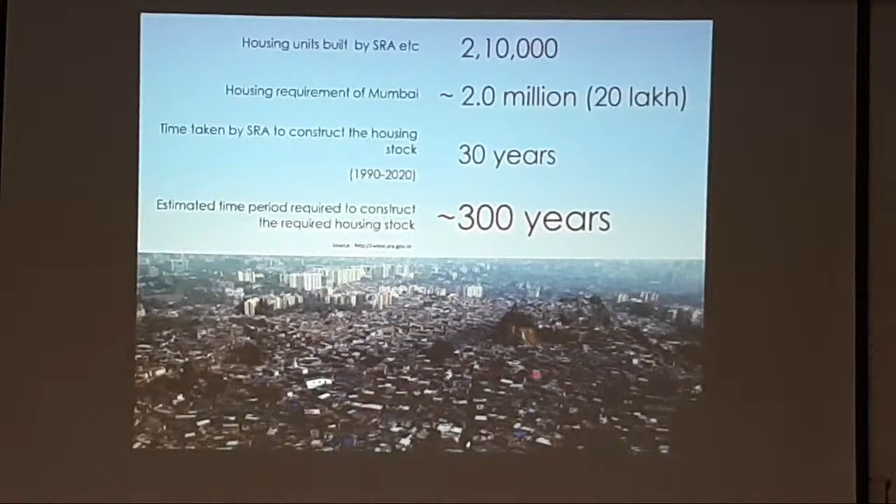The total requirement is approximately 2.0 million homes, which was the figure about 4 or 5 years ago. The rate at which the houses are being built is shocking, and the estimated time looking at these figures is about 300 years. Of course, in this time you'll have a further requirement of affordable homes.

So it's really not going as the government has planned. We've been trying to work with different kinds of agencies that are involved in the housing policies and frameworks within Mumbai.

Again, it's just looking at releasing some of the locked up lands, looking at how mass rapid public transport might make faraway lands easier to access, and finally, there's a lot of housing stock, land within the government which can be developed for housing stock.

So these first few projects are more at an urban policy framework scale. I just wanted to show these as well because eventually we're working at a different scale, but we're still looking at the spaces for people, still looking at the urban realm.

I'm going to go into a little more detail through some of our urban design intervention and process-based projects or sites. We started with some pilot projects where our main aim was to improve walkability across the city and improve the pedestrian experience. Currently, at every 50 to 100 meters, the paving material is changing. There are several types of tree surrounds, and several features like railings and bollards which really hinder movement. I won't get into footpath encroachment because that's a completely different discussion.

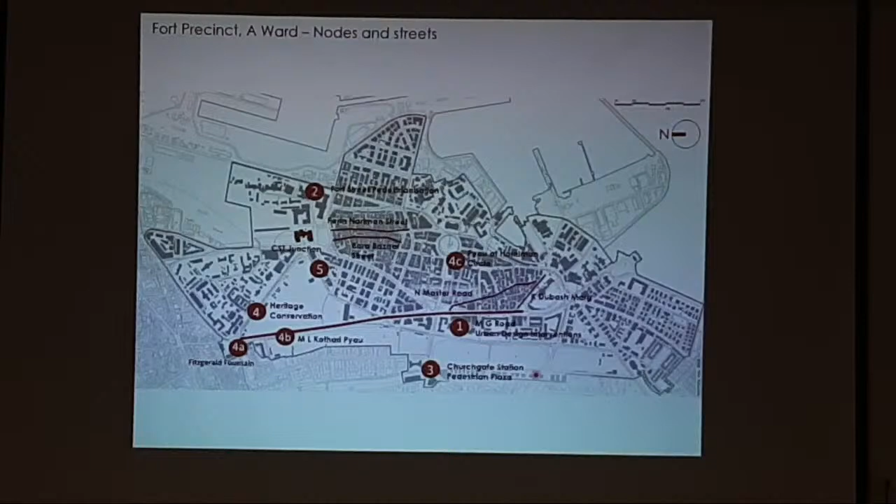So we did some pilot projects after working with BMC bureaucrats for a number of years, to get some momentum for these projects. Between 2021 and now, we've done 4 demonstration streets across Mumbai: one in Dadar, from Ruia College to Wadala Station, one in Chembur, Bandra East, and Goregaon West. We're also looking at a number of nodes and streets in the fort area. Some are in the stages of completion, some have just started, and some are still lying with the BMC decision-making.

Our main kind of intervention for these projects was just looking at some standardized principles and standardized elements, which we hope the BMC will eventually take on. These were really to demonstrate how we can make our footpaths more walkable. We've looked at a design life of 30 to 50 years for these footpaths, so we're hoping that over time, the number of times our footpaths get dug up because of poor surfacing or for utilities reduces drastically.

What we've tried to do is bring in some basic features using M40 concrete, and we're looking largely at making our footpaths universally accessible. Most of us, like my mom, never walk on the footpath because of the varying levels across it. She finds it easier to walk on the road, which is, of course, not worth walking on in Mumbai because you don't know when you'll get hit.

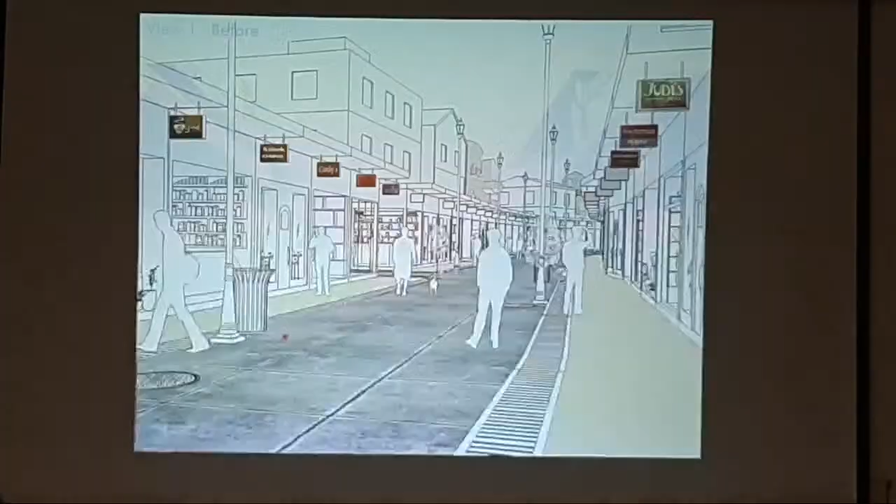As you see, this open drain actually still exists on site, but most of the shops have gone over the drain, and the majority have come out by at least 10 feet from the original building line. So we're just looking at what can be achieved as a midway.

Okay, so this is a recently completed project. I thought we'd always be talking about bureaucratic processes within BMC, but actually we found BMC quite instrumental in seeing this project to completion the way we envisaged, particularly the current additional municipal commissioner, Mrs. Ashwini Bhide, who was really instrumental in bringing about the changes.

As we were working with the BMC, we looked at other significant historic sites in this area. Tejpal Hall was the first seat of the Congress. August Kranti Maidan is where most of the movement took place. There's of course Mani Bhavan, and a part of the Dandi March took place at Girgaon Chowpatty. And finally, in current times, there's a garden here with Lokmanya Tilak's Smarak. So we were thinking if we could connect all these using a trail, where visitors to these sites might deviate and try to find the other sites as well.

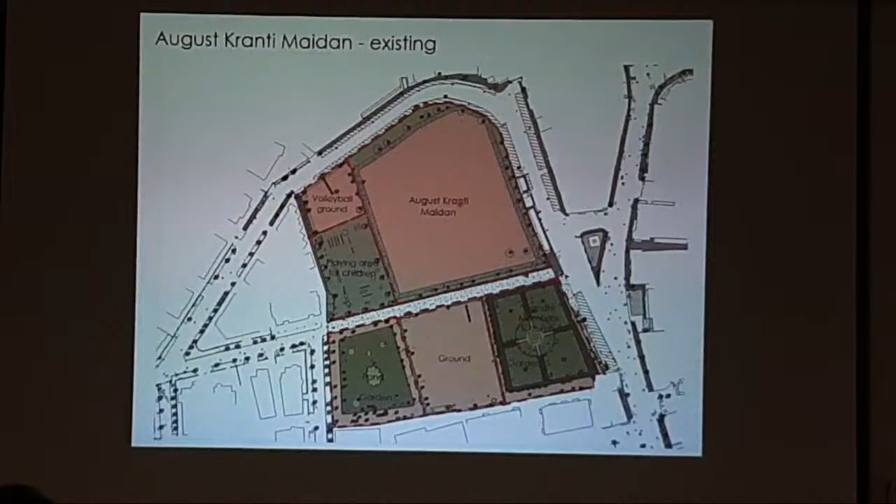This is a Gandhi Memorial, which was built in 1972. This little ground here, so there's a school just on the edge of the Maidan, and the ground has been leased by BMC to the school for children's activities. That still exists in part.

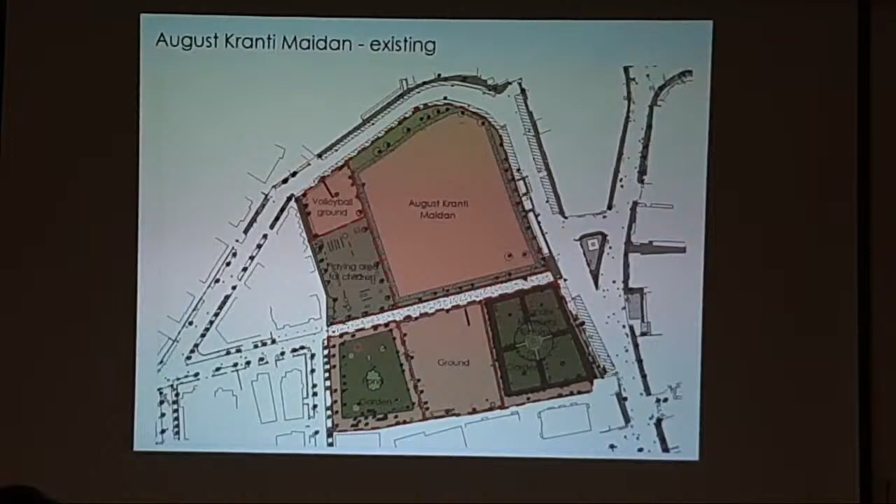There is a Nana Nani Park here. There was, and still is, a children's play area with all the equipment, and then in this far corner was a volleyball ground, which was used for all activities other than volleyball, as you might imagine.

Each of these red lines that you see are all fences in various states of deterioration. And this is what the original Maidan was like, except for this central pathway, nothing else existed.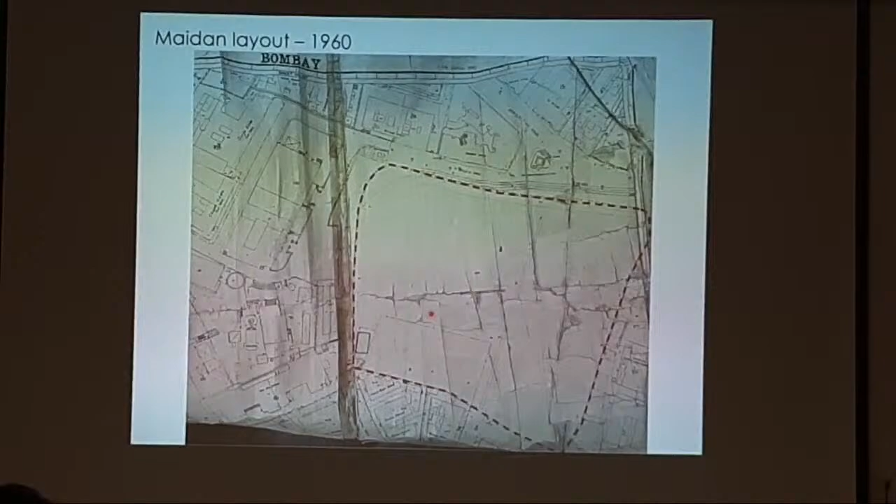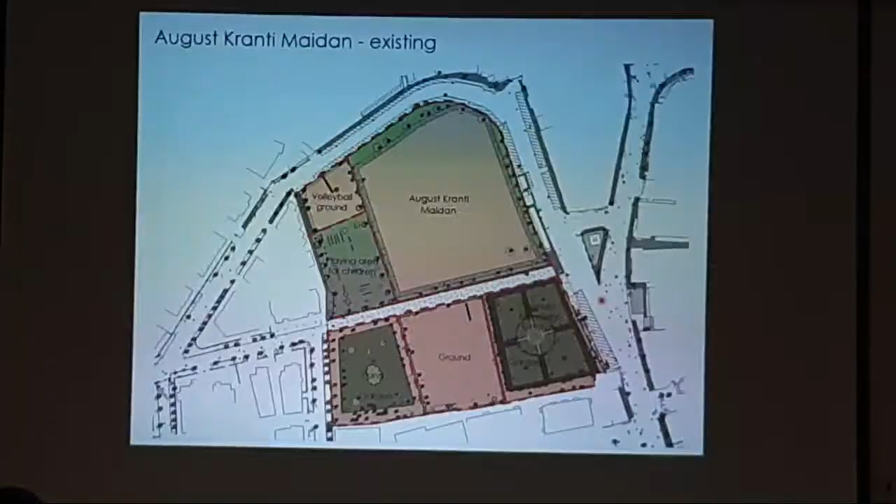In 1960, as you can see, there was a little bit of making, so the Gandhi Smarak came in and there was a bit of partitioning. But when we got to the site, this is how it was. Actually, when you go through here, you feel really uncomfortable.

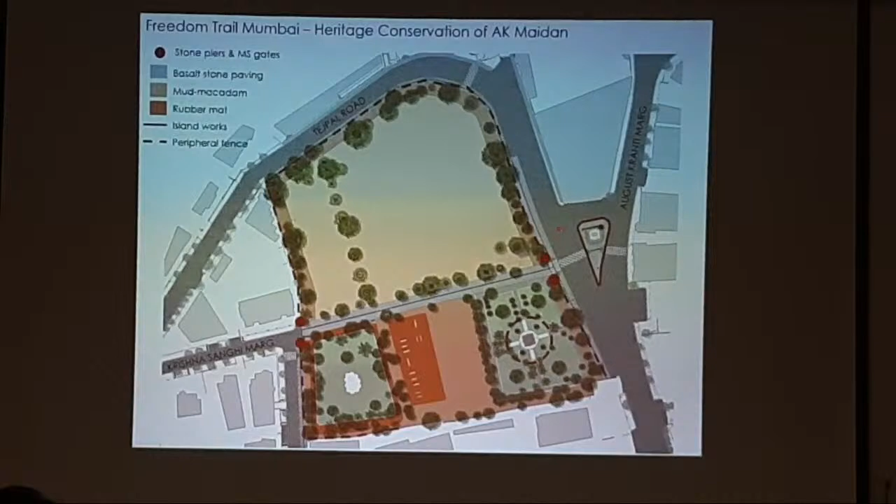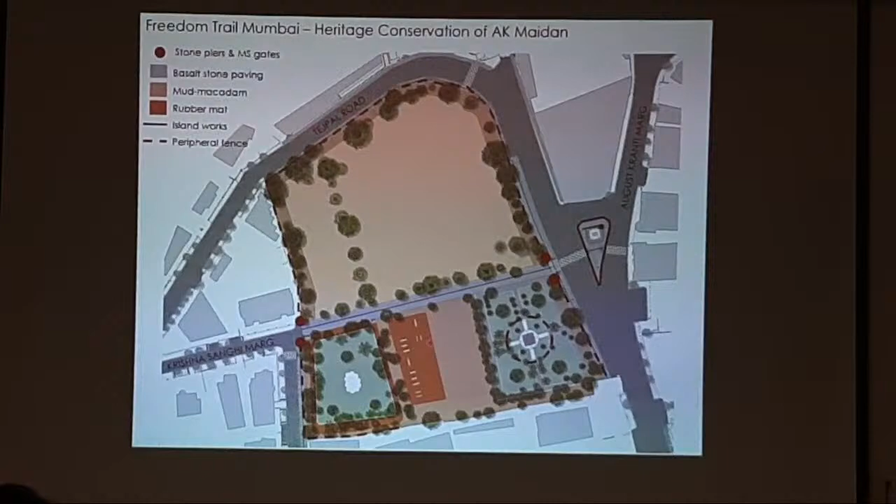This is what we had proposed and what we've managed to accomplish because of large support from the BMC and from the AMC. So the central pathway remains. We've brought down all the internal fences. The Gandhi Smarak remains, Nana Nani Park remains. The D Ward Assistant Commissioner requested that the children's play area be brought here so that this becomes one large space. I'll just take you through some before-after photos.

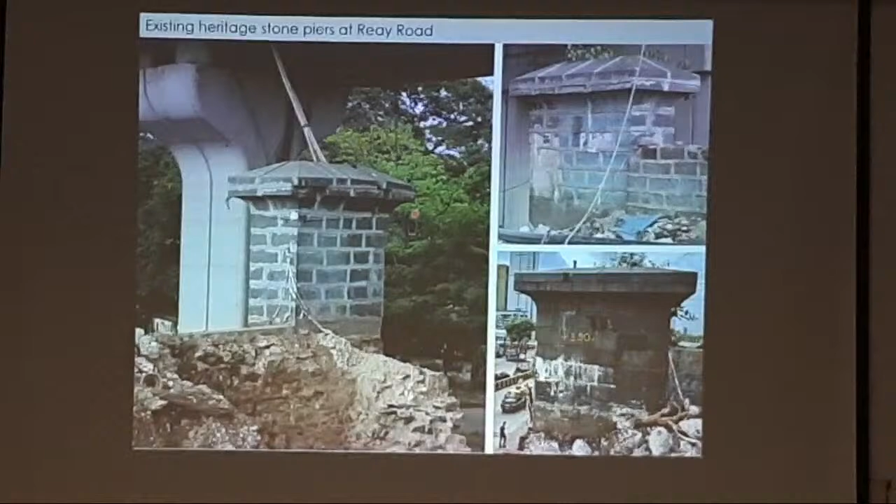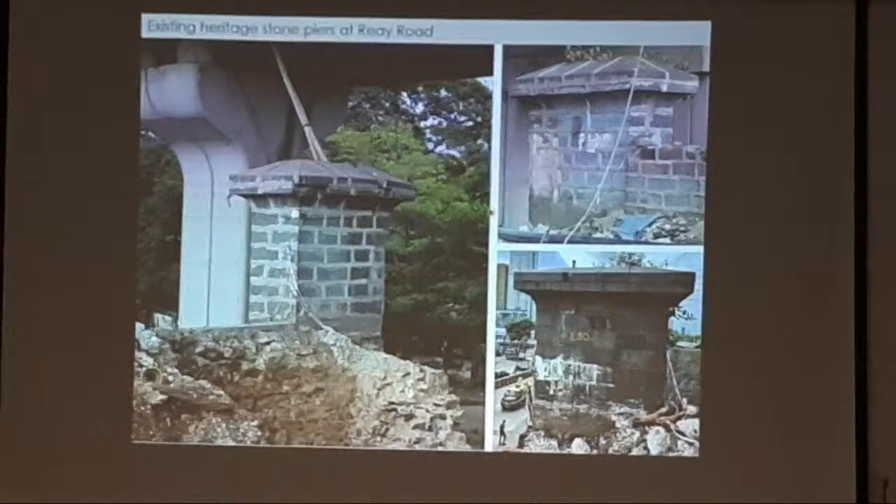As we started working on the project, we worked on it with the heritage team and the BMC, and they found out that the Reay Road bridge was being pulled down, and there were some great basalt stone piers which needed a new home rather than a dump yard. So we, after talking...

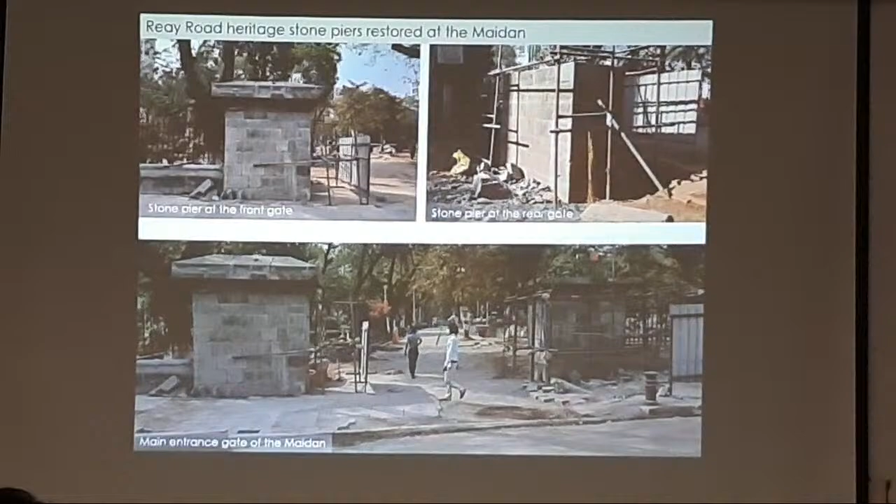Sorry. Sure, this is going to move. After managing to get approvals in the ongoing work, this is what... it's not going...

Just a few slides, I'll just...

I won't get into the details, but yeah, this was a traffic island which was barricaded. It looks like this today. The statue was almost not visible. We've put in this kind of red lacquer strip which marks the Freedom Trail.

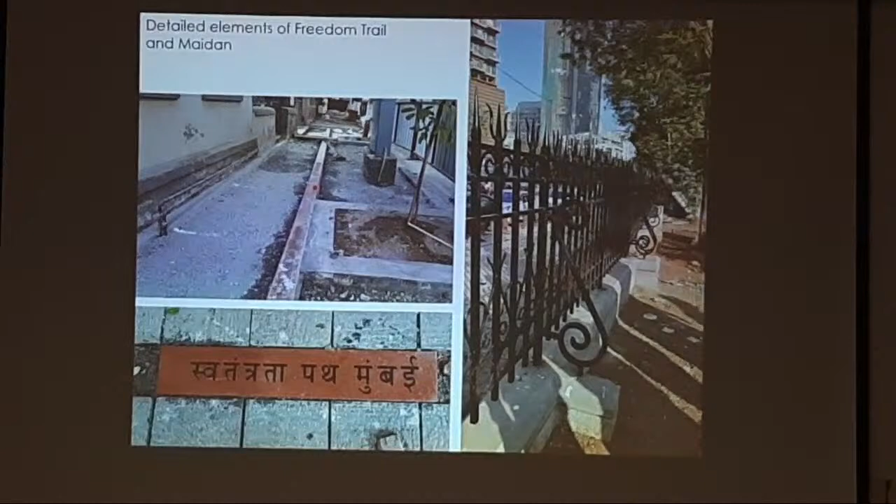I was just going to end with a few points to ponder, because looking at the kind of definition of commons, which is different from public spaces where the community is deeply involved in the spaces, I think somewhere along the way we seem to have the public feeling very entitled to that space, which is okay. I'm not putting it as a negative or a positive, just a few points to ponder.

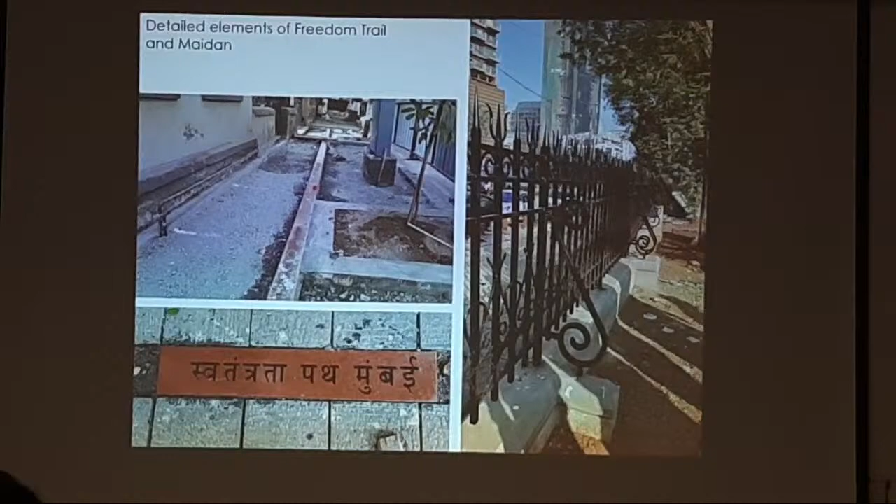So the minute we got the wall up again, we found certain quite interesting characteristics and elements that have come from a nearby community. Again, while the painting work had been taken off, they brought it back.

The other, more challenging thing is always the parking. This is what the periphery of the Maidan was like. The original footpath was removed and the cars were parking all the way to the Maidan wall. We brought the footpath back in, but people just continued to park the way they were, and again we had to bring the bollards back in.

And finally, it is this kind of blurry world between religion and politics at the moment, where again there is a lot of usage of these spaces. So the bollards are now being used for constructing mandaps, and the space that was freed up by the BMC is now being used, not constantly, but as a temporary mandap for different festivals.

So I just thought it's going to happen, and all we need to do is find that middle ground so that both can exist together. I think eventually that's our kind of conundrum. But we chose to show this project today because we thought it had a 90% or 95% win and very few losses in that sense.